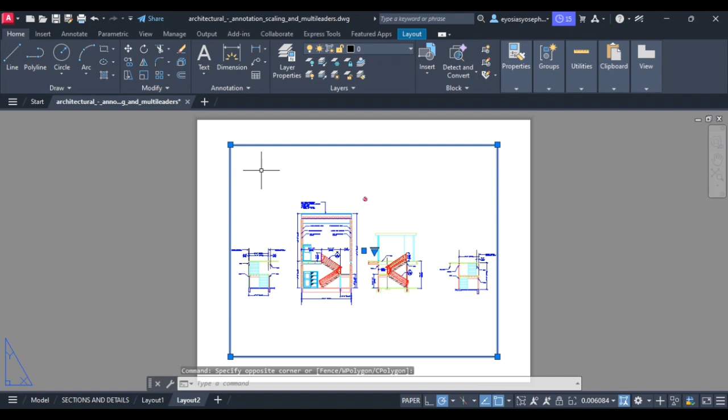Next, check your viewport. Your drawing should be visible inside a viewport window. If you don't have one, type MVIEW in the command line and press Enter. Then draw a rectangular viewport on your layout sheet. This viewport is what displays your model space drawing on the paper.

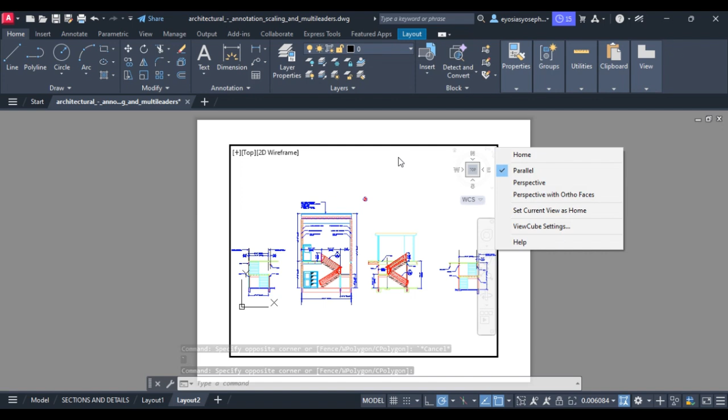Now, double-click inside the viewport to activate it. You are now controlling the model space view through the layout. At this point, you need to set the correct scale. For example, you might choose 1 to 100, 1 to 50, or another scale depending on your drawing requirements. You can set this from the status bar or through the Properties panel.

Once the scale is set, it's very important to lock the viewport so the scale doesn't change accidentally. Click on the viewport border, press Ctrl+1 to open Properties, and find Display Locked. Set it to Yes. This ensures your view stays fixed.

Now we move to the printing setup. Right-click on the Layout tab and choose Page Setup Manager. Click Modify to open the settings window. Here, select your printer or PDF plotter, such as DWG to PDF, if you want to export your drawing digitally. Next, choose the correct paper size, such as A4 or A3, depending on your project requirements.

After that, set Plot Area to Layout. This ensures the entire sheet is printed exactly as you see it in paper space. Then make sure the plot scale is set to 1 to 1. This is a critical step because the viewport already controls the drawing scale, so the layout itself must remain at full scale.

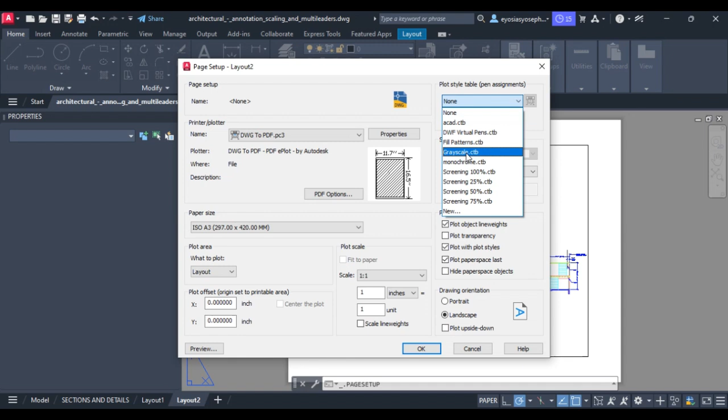Before finishing, check your plot style settings carefully because this controls how your drawing will actually look when printed. Plot styles determine important details like line weights, line types, and how different colors are translated into grayscale or printed line thickness. If your plot style is not set correctly, your drawing may look too light, too dark, or unclear when printed.

Now, click Preview to review your drawing. This step is important because it helps you catch any issues before printing. If everything looks good, click OK to print or export your drawing as a PDF. And that's it. You've successfully set up and printed an AutoCAD drawing to scale with a proper layout and viewport setup.